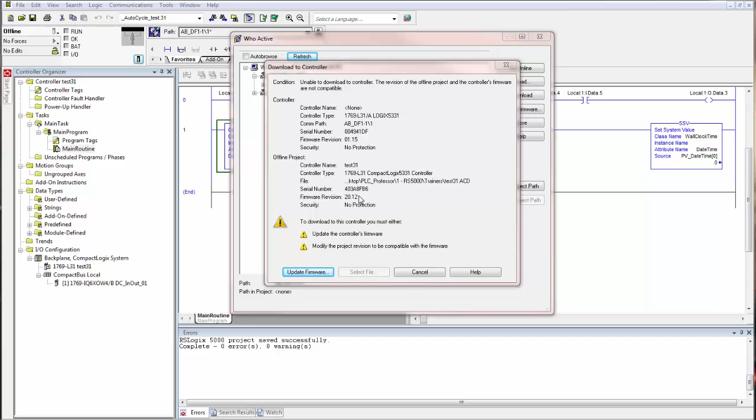Then it's going to come up and give you this message: unable to download to controller. The revision level of the offline project and the controller's firmware are not compatible. Notice it doesn't say online project. There is no such thing as an online project. You have offline projects and you have online program and data files. It's telling you what you have. Firmware Rev 1.15 and my program's at 20.12. That's okay. I want to update the firmware.

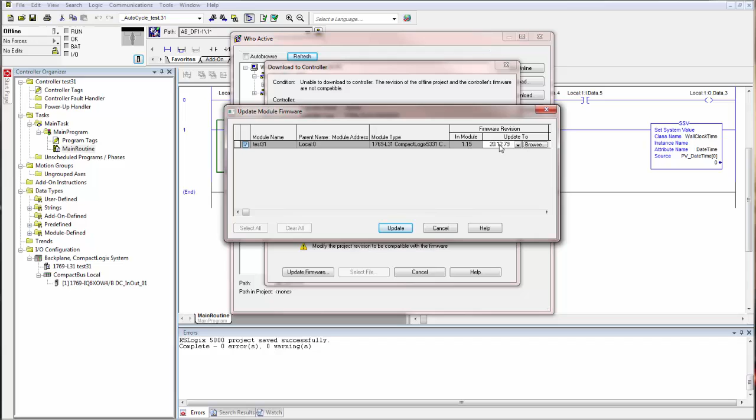Now we won't hang around for all of this because this takes a long time because we're doing it through RS-232. Very slow. Okay, so here's the particulars again, 1.15 to 20.12.79. Hit update. And now it says updating the module's firmware from 1.15 to 20.12.79 and some warnings. Yes. Okay, now that we've started this, if we were using 100 meg Ethernet, this would go fairly quick.

But I want you to notice it says transmitting block 90 something of 22,174. Well, if you look at the progress bar, I don't even see any progress. We'll wait a second here. We're going to pause this here in a second, but let's wait a second and see how many blocks you have to have before you even get the first inkling of progress. There are things that can bite you in the butt. Oh, I see a little tiny blue sliver showing up right there.

Maybe, maybe not. If the controller is not in the program mode, if it's in the run mode, when you try to do this, it won't complete the flash update. It has to be in the program mode in order to do that. In some cases, you may even have to unplug the battery and let the processor sit for a couple hours to make sure the capacitor drains off, if it has one. Okay, now we got a little bar down there. And by the way, notice what it says right here.

This is extremely important. Failure to maintain power and communications to the module during the update may render the module inoperable. Does that mean it renders it into a condition where it will not function unless you redo the flash? Or does it turn it into a brick? Well, it can be both. It could be something where you have to restart it, but it will restart.

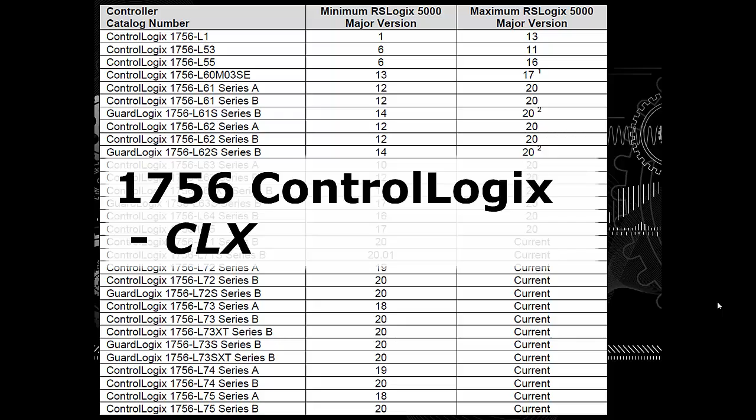This is a list of the 1756 ControlLogix, abbreviated CLX. Most often you see CLX for ControlLogix, CPX for CompactLogix. This is the recommended list of processors if you're going to go buy one to learn with. And the reason this is recommended, this group, the L6X series, is because of the cost and the maximum RSLogix 5000 major version that you can flash it to and use to program it with. And as you see, the minimum version varies between 12, 14, 16, 17, and the maximum is 20.

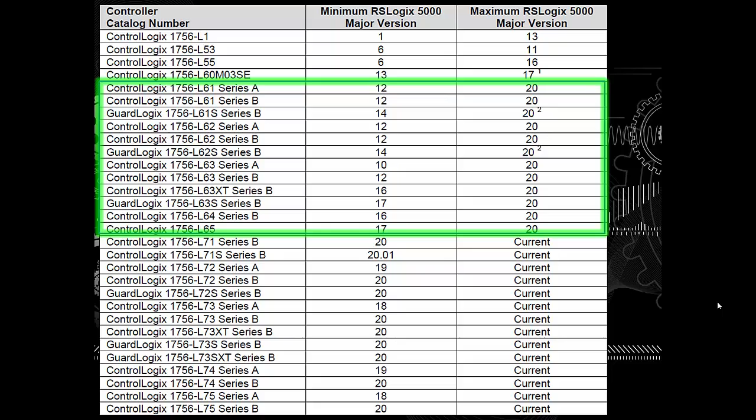I like to think of 17, 18, 19, and 20 as the current mainstream era of revision levels. There's newer levels than that. As a matter of fact, you see down below it says current. That would be version 21 and up. And at some point this chart will change.

The upper group, the 1756-L1, that was the very first processor back in, I can't remember, it's been quite a few years, 15 years ago. If I thought about it, I can remember the date. I remember the introduction of the L1 at Automation Fair in Nashville, Tennessee. It was a major quantum leap in processing for industrial controllers.

But anyway, look at that first group. The minimum is not as important as the maximum is. And although 17 is in that era of 17, 18, 19, and 20, it's just barely in there. Also, an L60M03SE is a special processor that has built-in motion capabilities for SERCOS. So it's unlikely that you would find an L60M03SE. But if you do, you cannot flash it higher than 17, which means that 17 is the highest major rev level of 5000 that you can use to program it with.

The group down below, I show those in yellow. Those are actually better than the group in the middle, meaning that they all are supported by the high end of the 17 through 20. So if you look down through the list, you don't see 17 anywhere. So 17 is kind of a gray area. So if you look up above, you see that 17 is the lowest or the minimum for several of the recommended ones. Now remember, I'm recommending that middle group in green based on price, not on capability. The bottom group in yellow has more capability.

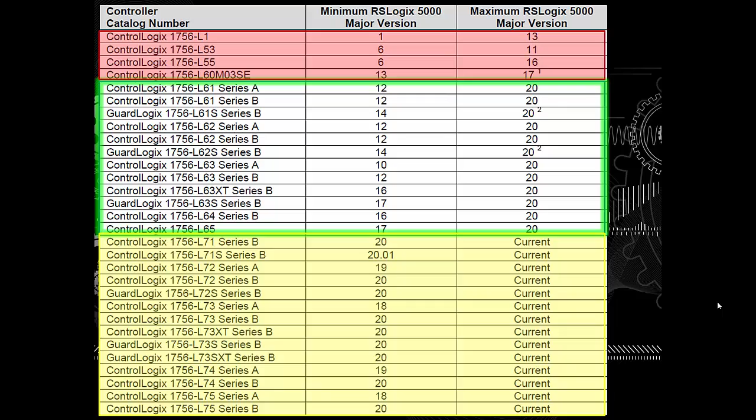Those are all L7X ControlLogix processors. If you buy one of those, you can use one of those well into the future for your learning purposes. Typically, when people buy a controller for learning, they work with it for 3 to 12 months and then they're done with it. Then they're off working someplace and they no longer have necessity for it. So that's why I'm recommending the group in the middle, the L6X for ControlLogix.

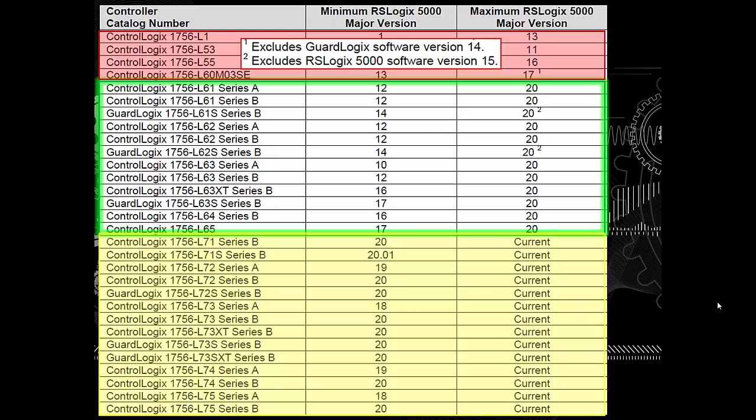And you notice a subscript there, 1 and 2. 17 with the 1 there, the L60M03SE, excludes GuardLogix software version 14. If I remember right, version 14 was one especially for, I think, General Motors or some big customer. And then, of course, you see 2 excludes RSLogix 5000 software version 15. So that's kind of a fly in the ointment on those 2 right there. It doesn't include version 15, even though it shows 14 to 20 for both of those. It does not include 15 of 5000. It doesn't include GuardLogix for 14.

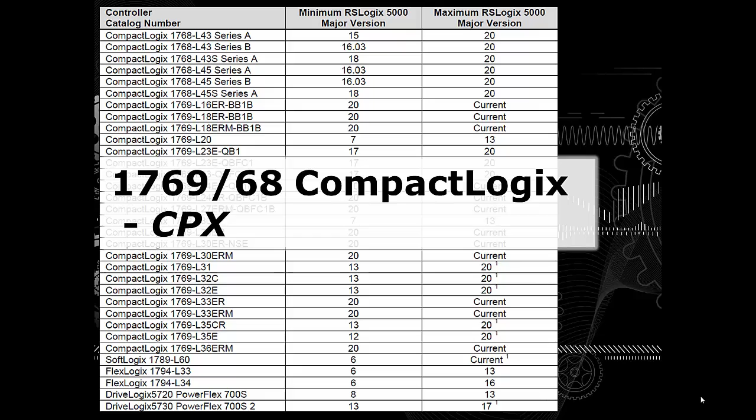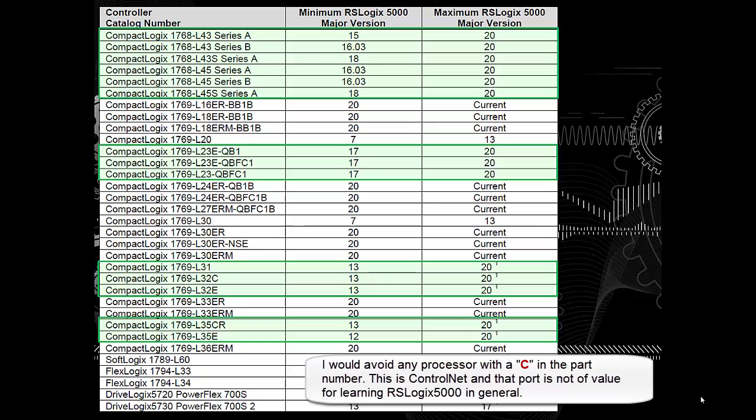In the top group is the 1768 L43, L45 series. Of those, the L43 is going to be the least expensive. Now notice everything in green has a maximum rev level of 20. The minimum rev level is really not that relevant, but the maximum is, because you want to learn with the highest possible rev level, which has the most features. Now the other group that says current, and there's some other ones there that aren't marked yet that say 13 for maximum, they're going to pop up here in a minute. So let's just stick with what's in green right now. So the top group is 1768.

That comes in two flavors, 43 and 45. One has more memory, less memory. These processors, the 43 and the 45, have two backplanes. They have an active backplane to the right. As you look at the processor, the active backplane, which uses 1769 I/O modules, is to the right as you look at the processor from the front of it.

Not out from it, but looking at it. And to the left is the passive backplane. Passive means that the controller is not controlling the backplane, so it's passive. Active, the controller controls the backplane, so it's active because it activates the modules across the backplane.

The next group there, L23, you have E and just L23. The E means Ethernet. If you were going to purchase an L23, the least expensive one is going to be the QBFC1. Both of those that have the E designation will give you Ethernet, which is good, but it's going to be more expensive than an L23 non-E. So the bottom of the three there is the least expensive to find on the internet. Now, I'm talking used, not brand new. I'm not even sure which of these they still make brand new.

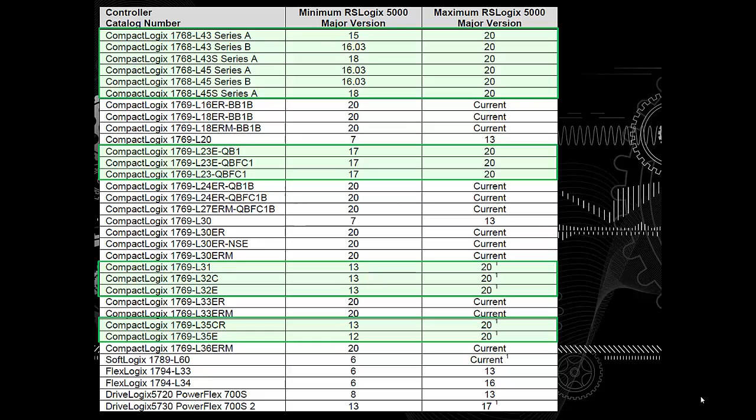Go a little further down the list, and these are a little bit newer: the L31, 32C, C for ControlNet, E for Ethernet, and then CR, ControlNet Redundant, and L35E. So 31, 32, 35, more memory as you go up in numbers, ControlNet, Ethernet, or just RS-232. The L31 has 2 RS-232 ports.

In red, the L20 maximum major revision 13 and the L30 maximum 13, and then the L33, 34, and then, you know, I kind of included the DriveLogix. I don't care about FlexLogix and DriveLogix for this lecture. They were in the list, so I just included them in case somebody happened to have one laying around. FlexLogix kind of went the way of the Edsel many moons ago.

And there was nothing wrong with FlexLogix. It worked fine. It runs the Logix engine, but the physical format wasn't that popular. People liked either the Compact or the Control. They just didn't like the physical shape and installation of the FlexLogix. DriveLogix, that's a whole different ballgame. We're not even going to talk about that.

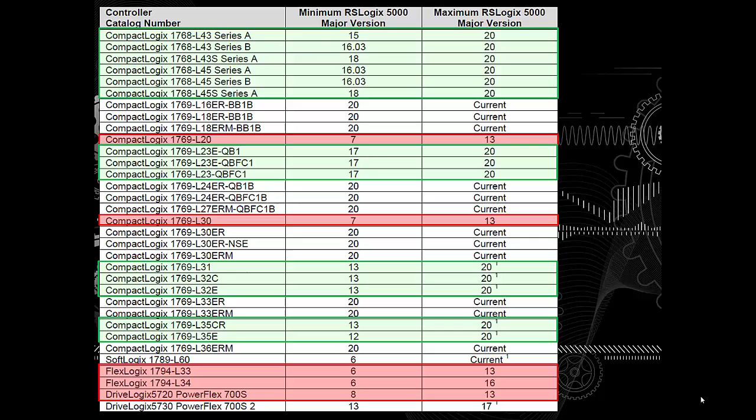I would avoid what's in red here, mainly because you're not going to be able to program it with anything that even looks like the latest software, version 13 in most cases. You don't want that. And then, of course, in yellow, we have, I didn't mean for that to pop up yet, but it did, so that's fine. You can see there are some items down there, both in green and yellow, that have a 1 next to it. Remember, 1 excludes GuardLogix software version 14.

Nonetheless, in yellow, at the top, notice that these all say current for the maximum RSLogix 5000 major version. That means that you can program them with version 21, which is Studio 5000, and version 22 if that's out, 23, and so on.

So if you do purchase one of the new L1, L2, L3, 5370 series, it's going to have a long lifespan for you to work with. Typically, again, 3 to 12 months and you're done with your training hardware. You sell it on eBay, give it away, lend it to a friend, and off you go on your career.

So the yellow, and notice down there that there is SoftLogix down towards the bottom. We're not going to talk about SoftLogix. I'm really only concerned primarily with CompactLogix. If you happen to buy a 1756 ControlLogix, it's a little more expensive. The modules are more expensive. The backplane's a separate piece of hardware. It's not built right into each module like 1769 and 1768 I/O modules for CompactLogix.

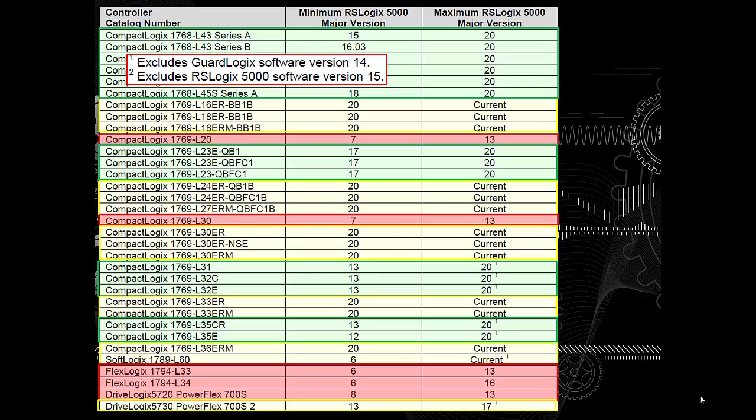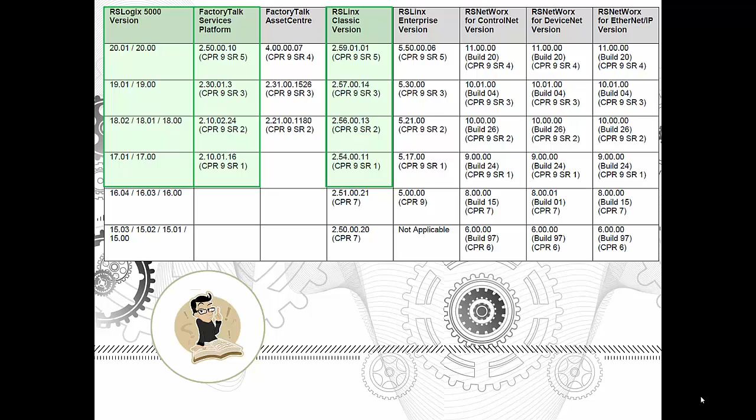And then, of course, when you load 5000 in any of the more powerful platforms, you're going to need FactoryTalk Services Platform. That's not something that you buy separate. That's something that comes with 5000. But notice there is a slight difference there. Notice that there's 2.1 twice, 2.3 and 2.5. So you're going to want 2.5 if you're going to use version 20 or 20.01.

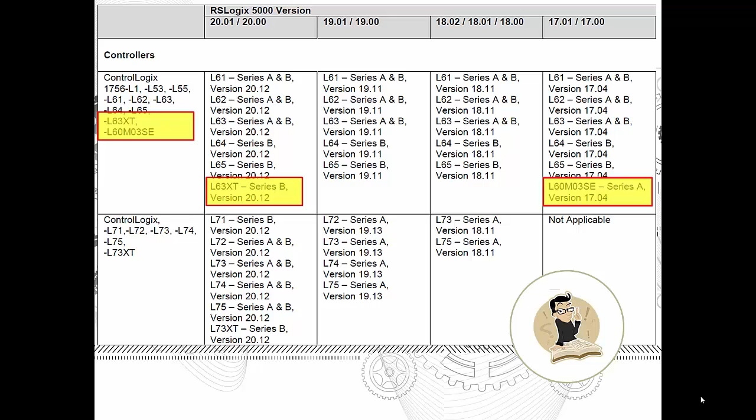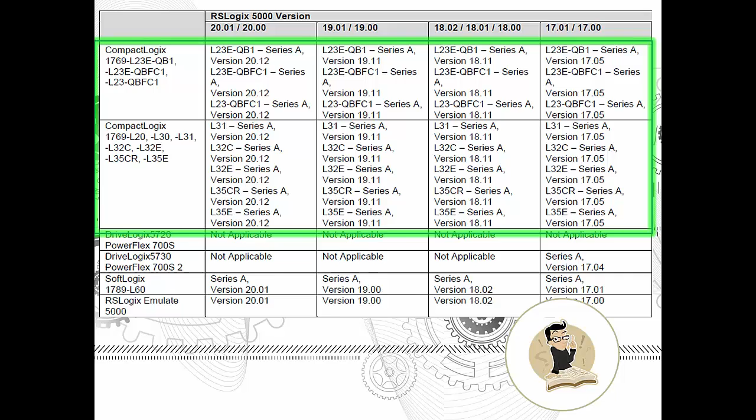Now, if you have software, you can open up the revision notes and you can read down through there. You can get all this compatibility information. I'm just including it all here for your convenience. Okay, electronic data sheets, EDS files.

In RSLinx, if you have an object that shows up in the path in the tree of communication devices, and it's not a red X but a question mark, it may be that it sees it but doesn't know what it is, because RSLinx does not have an electronic data sheet for that particular part number. If that happens to you, you can go on the internet to www.rockwellautomation.com, resources, EDS, type in the part number, and download the EDS sheet, the electronic data sheet. Download all those into a folder somewhere on your hard drive.

Then you can go into Rockwell Software, RSLinx, Tools, and find the EDS hardware installation tool. This also works the same way for DeviceNet, EtherNet/IP, and ControlNet if you want to download EDS files.

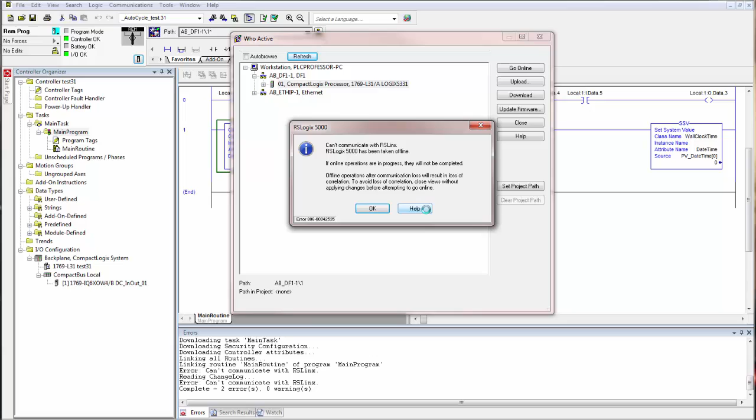Eventually it's going to time out, because the instant that I said yes, update the baud rate for channel 0 to 38.4, the instant that took effect, we lost communication. So all of this time that we waited, and I probably clipped out some of it, it was in a timeout process. So we'll say OK.

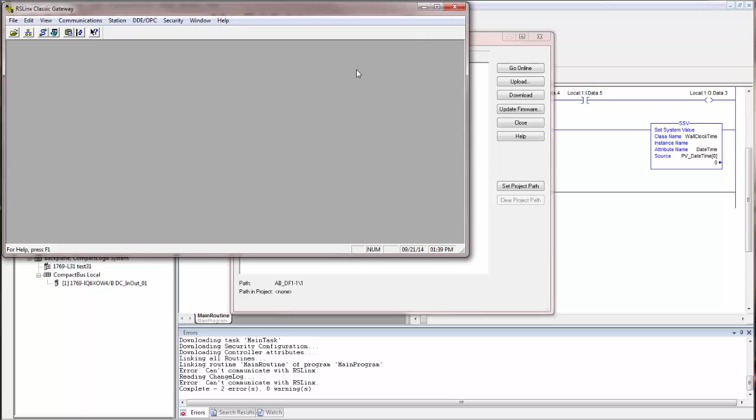Now we go back to Linx. We go to the double-headed snake, configure drivers, go to configure, auto configure, and you see auto configuration successful at 38.4. We'll say OK. We'll close that. We'll minimize Linx. And we already downloaded, so I will close this.

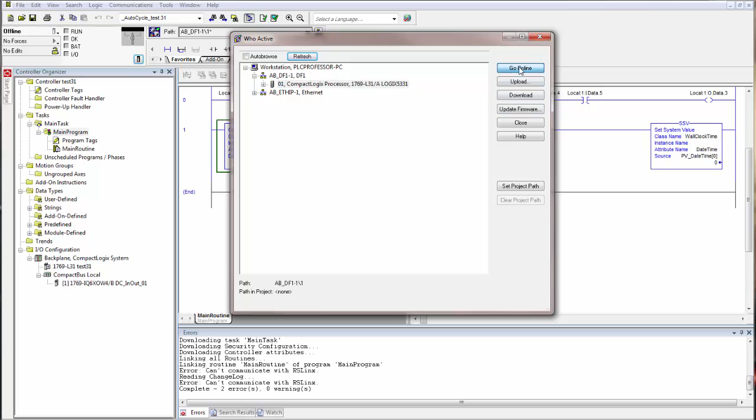I can go online in several ways. I could do it from here, or I can do it from communications. I always recommend you go from communications, just in case there's more than one processor out there, so you can see where you're going. So there's our processor. Go online, remote program, I/O OK, controller OK. Correlation required. Changes will be uploaded from the controller. Save the project before correlating.

No. In your situation, you might have picked yes, but in my situation, I didn't want to change my offline project to match whatever might have been in that controller. I don't know what the variation could have been. So I'm in remote program mode now, so I'm going to go to run mode. And I'm going to flip the toggle switches on. You see that turned on output 0, output 1, output 2, and then 3 more switches turns on output 3.

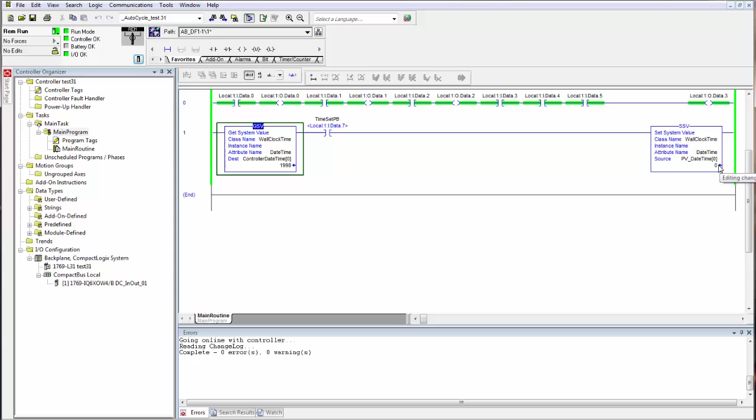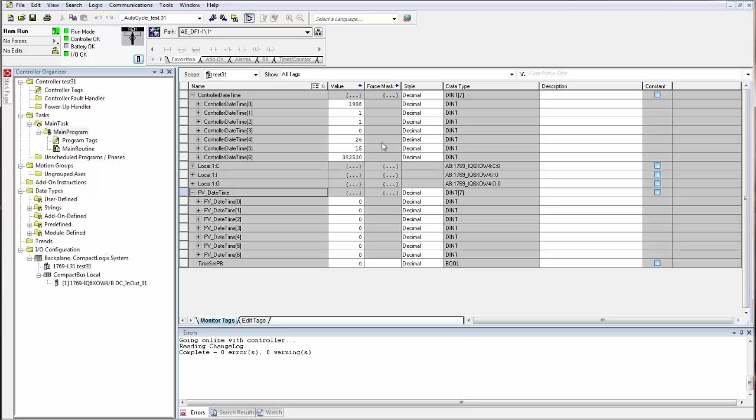And you can see the time in here. Well, you see over here it says 1998, and there it says 0. So let's go to monitor, and we'll expand this one. So this is what's in the controller right now, 1998, and that's kind of the default time base. Now I'm going to try something I wasn't planning on here. I'm going to close this, go up to view and turn on watch, drag this up, and expand.

Well, it looks like we can't get this whole display in there, so I'll show you this one so you can see that it's all zeros. That's this one over here. This one at the top is only showing controller date time of the first integer, and I want to see the entire array of 7 double integers, and I'm not going to be able to display that here.

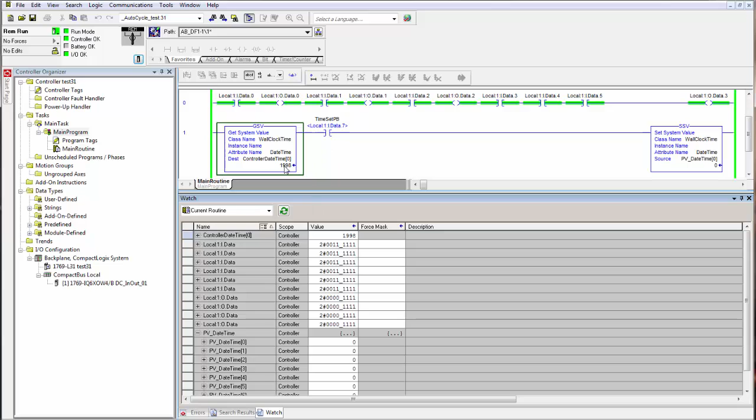I just powered down the processor, actually powered down the system, swapped the processor with one that has revision 15 in it. We might want to download, but first I'm going to flash the firmware with something called Control Flash, which is really the software we just used. In Flash Programming Tools, over in my main menu, Control Flash, and it opens up. I'm going to minimize this. It's not really necessary because all the action takes place right in the middle of the screen.

Stretch this out. Okay, this is Control Flash, and you could read the instructions if you want. I'm not going to read the instructions. I'm going to go next. I have a 1769 L31. Now, it does not know I have an L31. It just so happens that I've been flashing a half a dozen or so of these L31s to use them in class, and the last thing I picked was L31, so it came up with L31. So don't expect Control Flash to know what processor you have. You have to pick it. It just happened to be on L31.

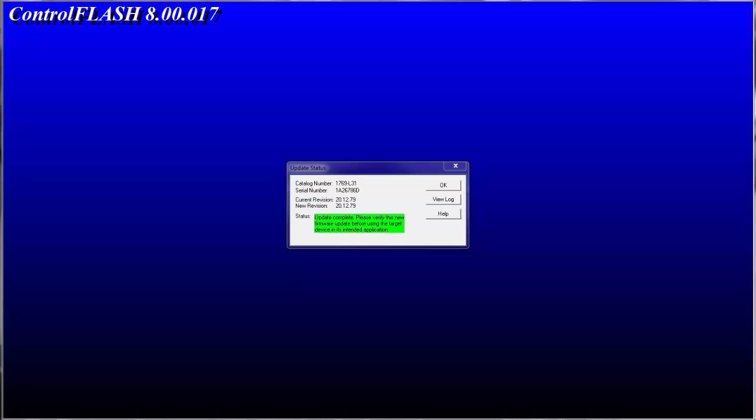Of course, this is going to take a long time, like half hour, 45 minutes. I'm going to pause and then come back when it's done. 45 minutes later, update complete. Please verify this new firmware update before using the target device in its intended application. I do plan on doing that. So I'm going to say OK, and of course it wants to know if we want to flash something else. Keep in mind ControlFLASH is the application that you flash the firmware with in all Logix 5000 processors and all 1756 I/O modules and other modules that have flashable firmware. So I'm going to cancel and end this session.

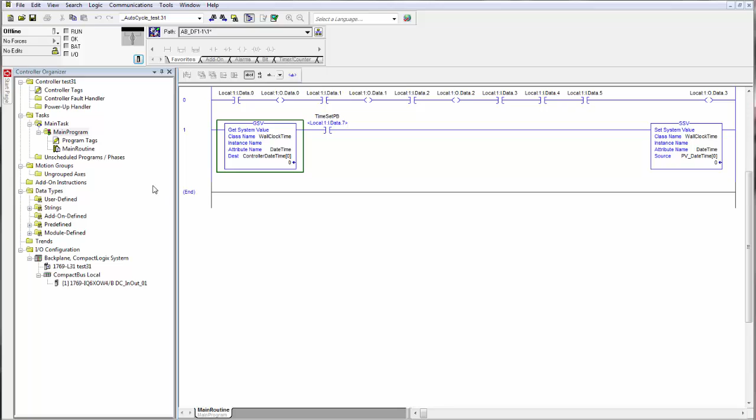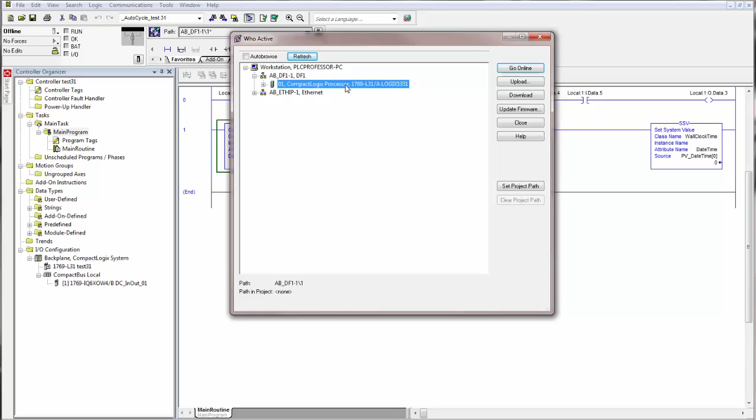Now I'm going to open RSLinx and look to see if I have my processor there. I get the red X. If the red X doesn't go away, then I'm going to have to, oh, it did, so whatever baud rate we've got set, it's the same on both ends. So I'm going to close that, minimize that, and open up RSLogix 5000 to our test program. Now I'm going to click on the processor properties, look at channel 0 serial port. It's 38.4. I like that. Now when we download, of course, we're going to lose communications, but let's go ahead and follow through. So communications, Who Active, pick our processor, download, wait.

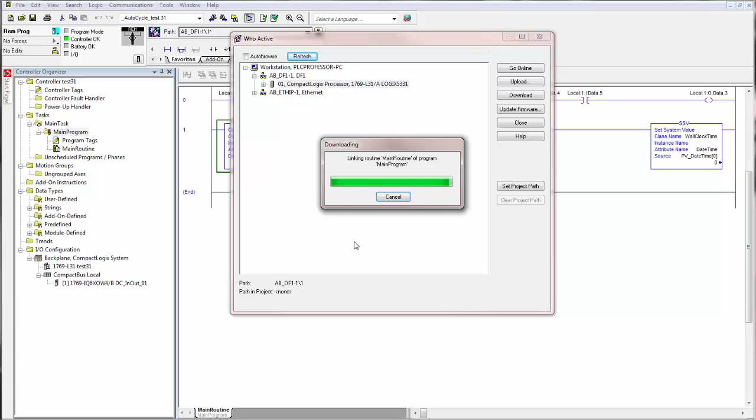We want to download, and we will probably get a message that asks if we want to use the offline project communication settings or leave them as is. Now I prefer 38.4 communications, so while I'm here I might as well change it, let it go ahead and download 38.4, and lose communications.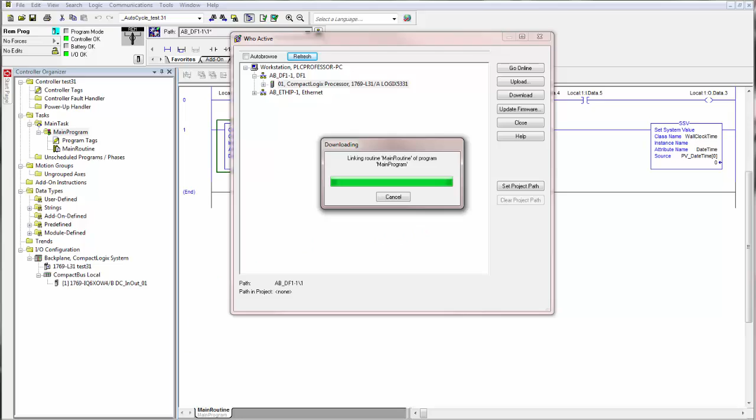See, the online serial configuration is different from the offline serial configuration. Applying the configuration, loss of comm. Do you want to apply? Yes. And of course, it loses communication, so none of this is active now. We can sit and go through the timeout, or we can open up RSLinx, double-headed snake, configure drivers, select the DF1 driver, configure, auto-configure, 38.4, successful, OK, close, minimize, and come back.

And what you just witnessed was something I've actually never done before, and that is it's lost communications, but it's in a timeout. I quickly went and changed the configuration in RSLinx, and it changed it quick enough that it was still in the timeout process. It caught communications, and now we're in remote program mode. So I'm going to switch to run mode.

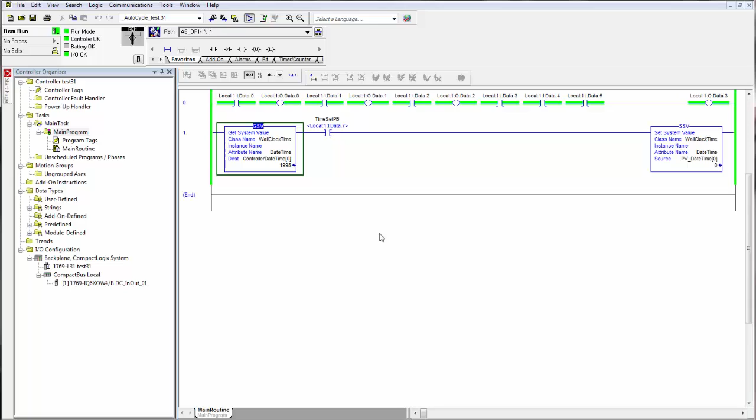And as soon as I did, I heard relay outputs on the controller that I'm using. One more to turn off. And there you have it. Go offline before we disconnect from the processor. Changes have been made. Save the changes. I'll say yes, because it all looks good to me. Okay, and that basically concludes our flashing the firmware and our compatibility.